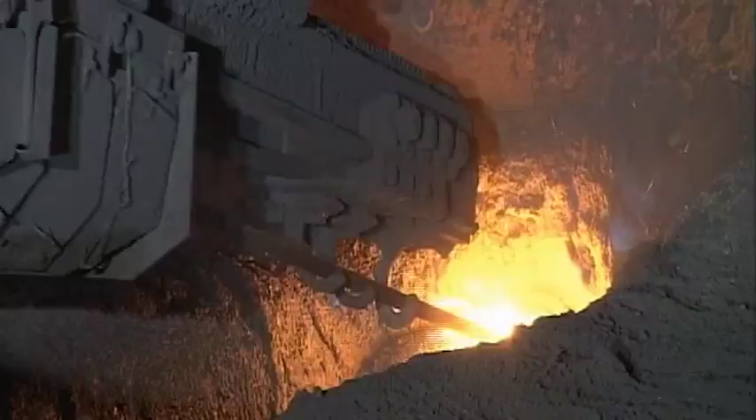JFE Group is one of the leading business groups in Japan, whose activities range from steel manufacturing to shipbuilding and to engineering and construction of industrial plants. JFE Group has 54,000 employees and 230 group companies. Its annual sales volume amounts to 32 billion euros.

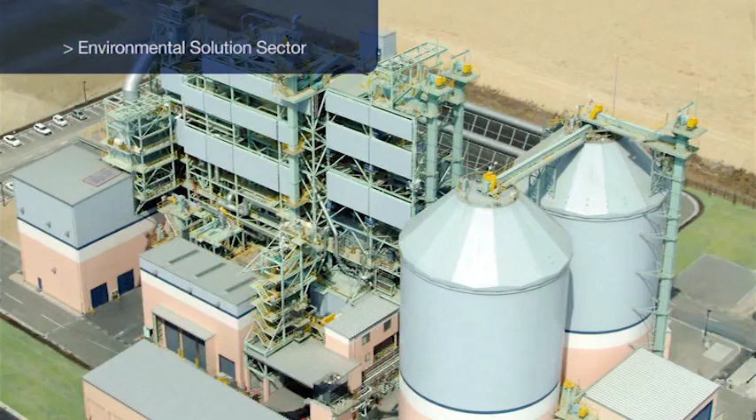JFE Engineering, with its 7,300 employees and its sales of over 2.7 billion euros, is one of the main activities of the JFE Group. It operates through specific divisions in these fields: environmental solution, recycling, energy industries, steel structures, industrial machinery, and research.

Its engineering capability, extensive operational experiences, and a clear recognition of the changes in our society give the company a foresighted vision of the future. JFE Engineering gives priority to combining its corporate growth with respect for the environment. Japan, as a densely populated country, has had to focus on environmental protection, which includes resolving the waste disposal problems. Within this framework, JFE Engineering has been working for over 40 years to change waste into resource.

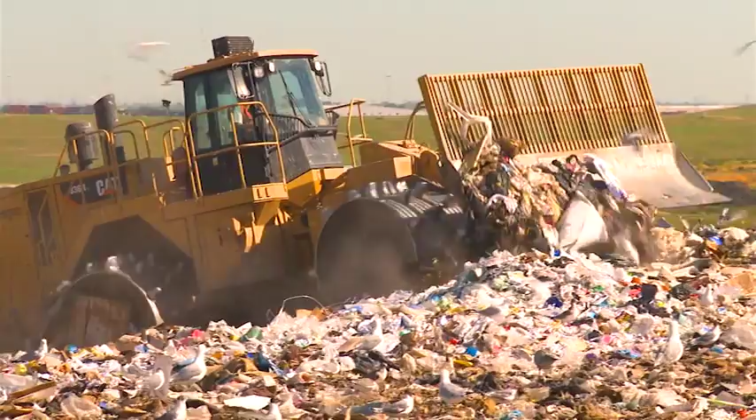From 1968 to the present day, JFE Engineering has designed and built over 150 thermal treatment plants, thus becoming one of the leading companies in the industry and contributing to Japan's success in its modern management strategy. Applying the technology, Japan has succeeded in drastic reduction in landfills, where now only 2% of the total waste is being directly landfilled. The growing awareness of environmental protection leads to the suppression of landfills and of the problems related to this kind of waste treatment.

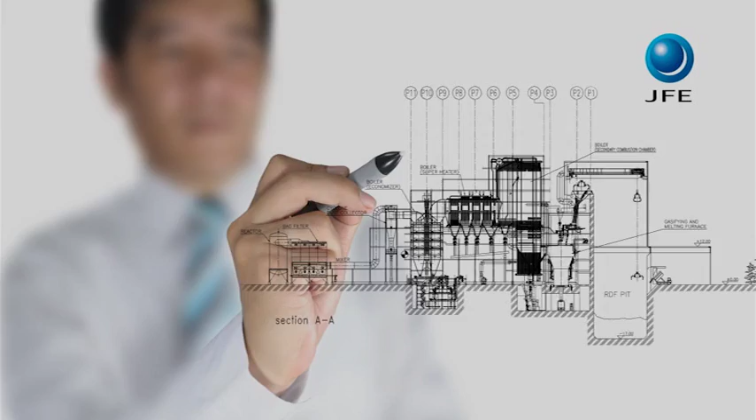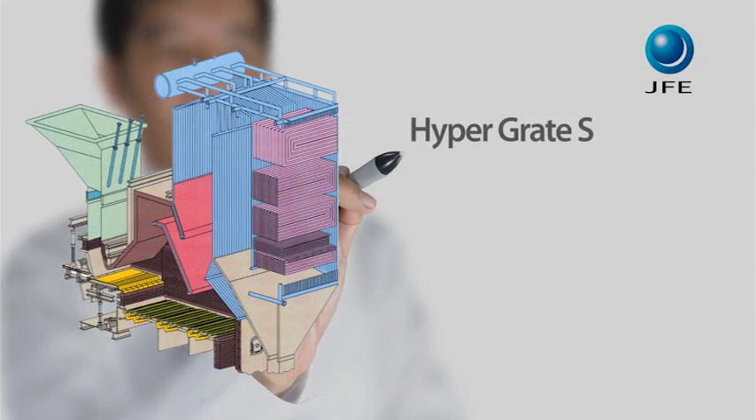In order to put an end to the era of landfills, the European Union has adopted a waste management strategy based on recycling and recovery. Nowadays in the European Union, about 40% of the municipal waste is being landfilled after treatment. The waste that cannot be recycled should be changed to energy or other valuable products through dependable thermal treatment technologies. This is the reason why for over 40 years, JFE Engineering has developed a variety of plant solutions for waste thermal treatment. It is now able to provide all the conventional technologies in their most advanced versions. For example, the Hyper Grate S system, a cutting-edge development of the grate system that makes it possible to obtain the best performance ever with this type of process.

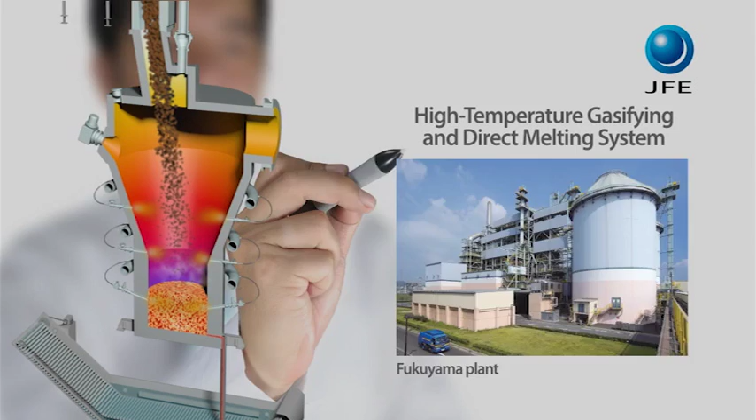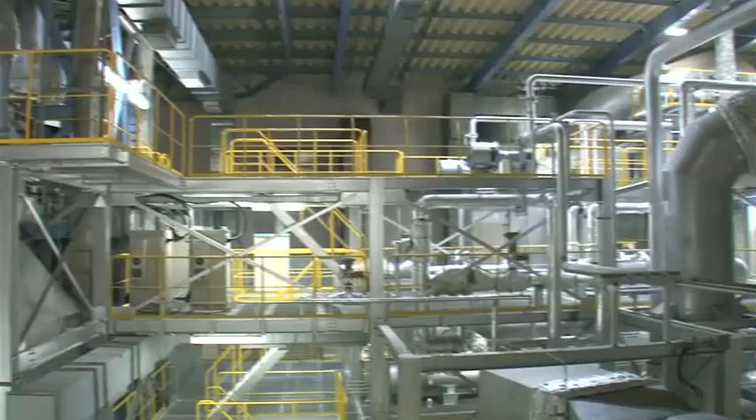The growing demand for environmental sustainability has led and will lead us to adopt increasingly strict regulations and social acceptance criteria. With this in mind, JFE has created its most advanced solution based on the gasifying process, high-temperature gasifying and direct melting system. High-temperature gasifying and direct melting system combines superior environmental protection performance characteristic of the gasifying process with high energy efficiency and top-level reliability.

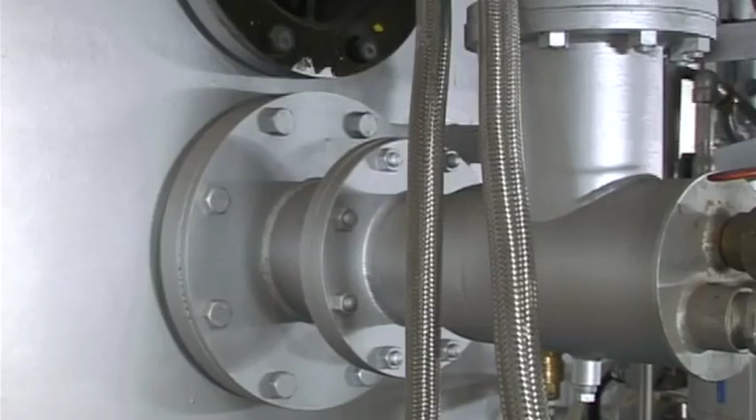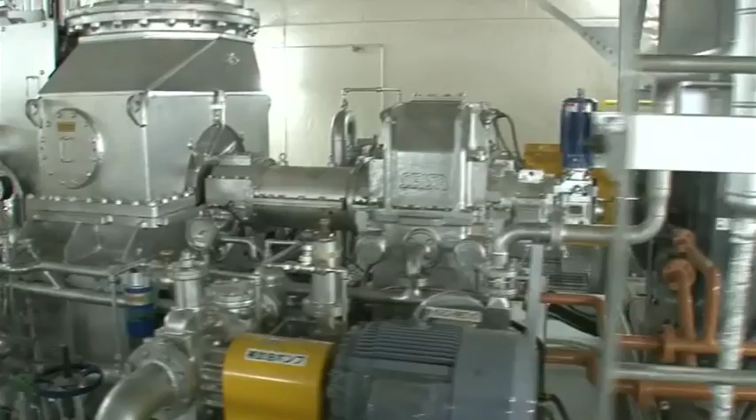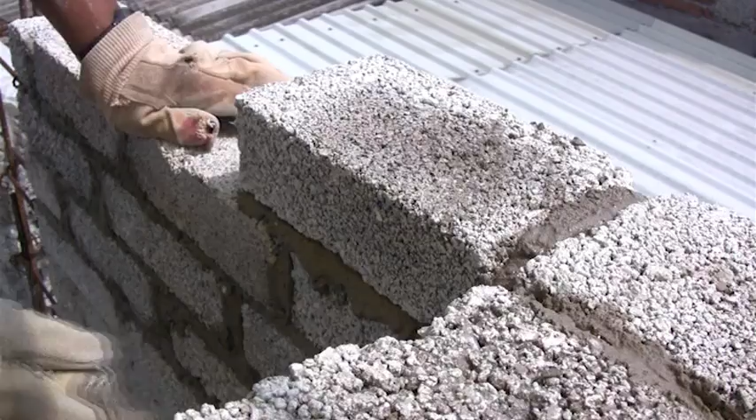The main feature of the process is indirect combustion through gasification of waste. Waste is no longer directly burnt, as is the case for conventional plants, but it is converted into gas. The gas generated is used to produce electrical and thermal energy through an efficient and controlled gas combustion process. By using this technology, it is also possible to recover incombustibles of waste as inert slag and metal, which are recycled in Japan for civil works and industrial purposes. In this way, bottom ash is no longer produced.

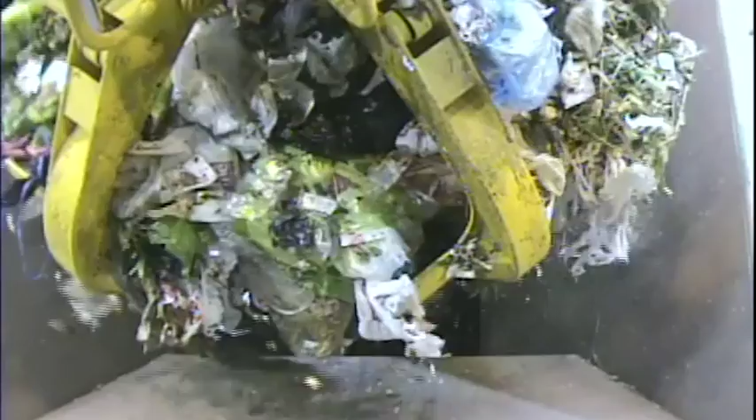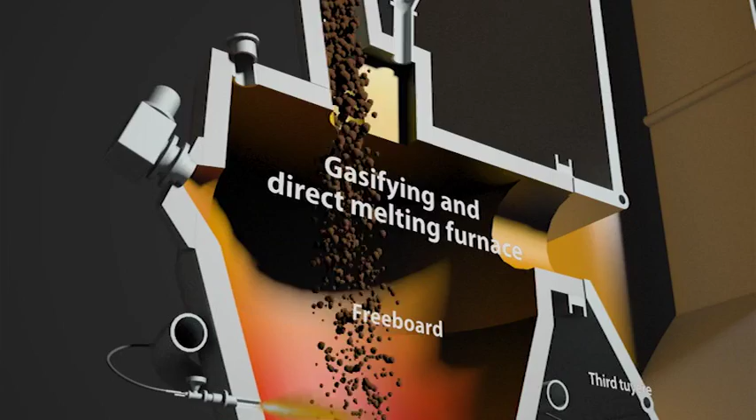The furnace is one of the key components of the system. Waste coming from the storage pit is fed into the furnace. In the gasifying layer inside the furnace, the waste that is placed into the furnace is converted to gas. This happens at 550 to 650 degrees Celsius by means of a controlled air supply through a secondary tuyere.

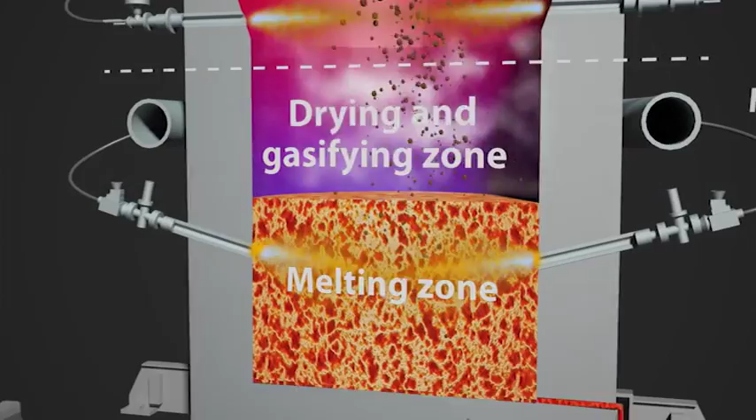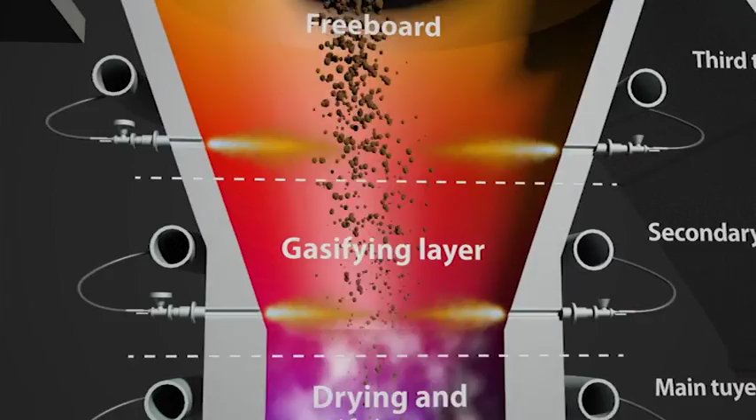Incombustible fraction of waste goes down to the melting layer, where a temperature around 1600 degrees Celsius makes melting possible. This high temperature is achieved with the combustion of carbon having the same function as in a blast furnace for steel making and the controlled injection of oxygen-enriched air through the main tuyere. The melted incombustibles are extracted continuously and brought back to its solid state in a granular form, thus making it possible to separate metal from slag.

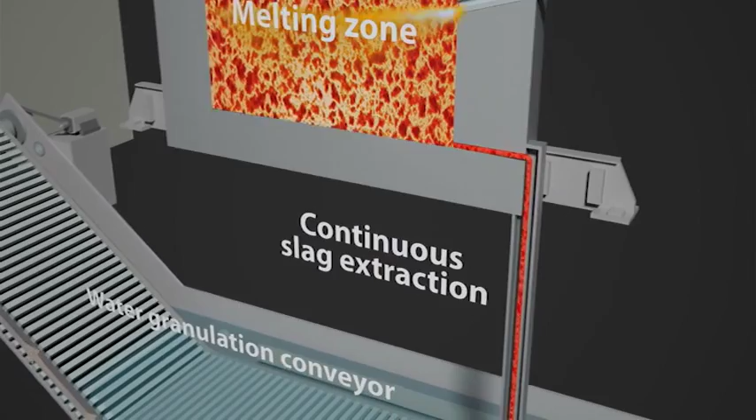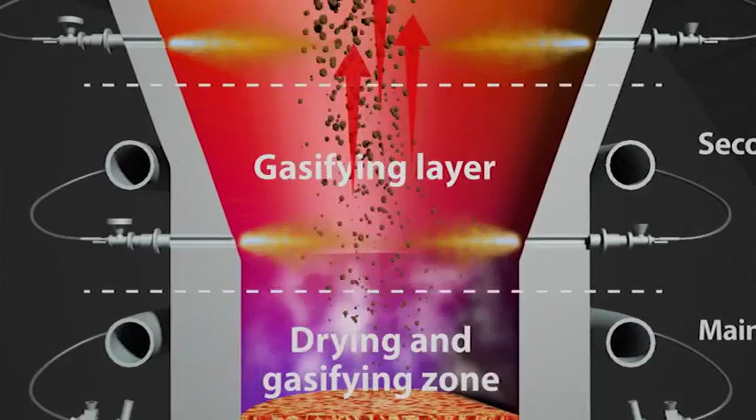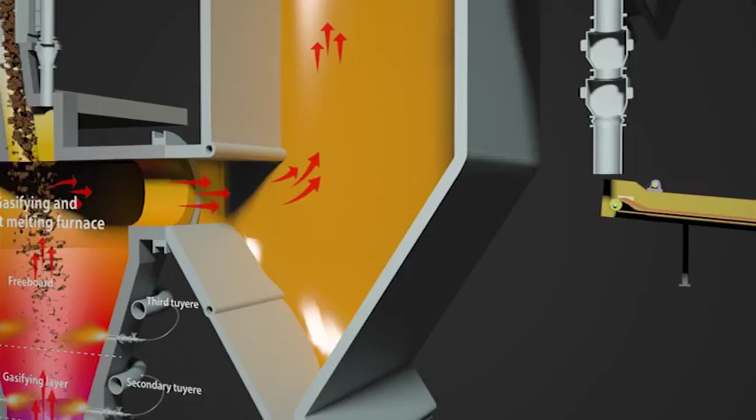The gas generated from waste goes up to the freeboard where it completes its conversion process. The generation of hazardous substances is prevented by the reducing atmosphere at a temperature of 850 to 950 degrees Celsius. The gas obtained from waste is combusted in the secondary combustion chamber. The heat produces high pressure and high temperature steam in a boiler. The steam generates electric power through a high efficiency steam cycle or can be used for district heating or other industrial applications.

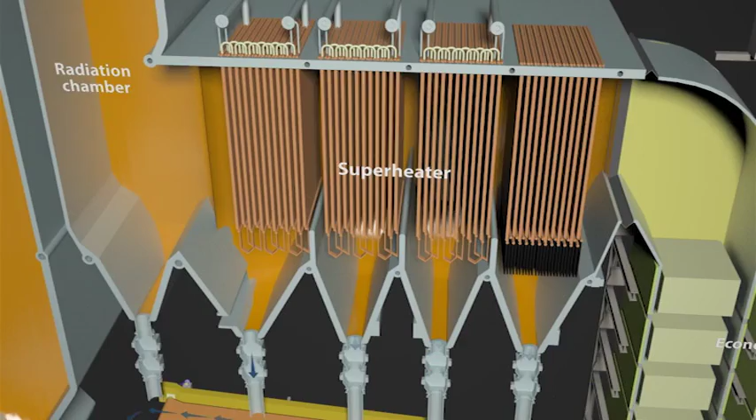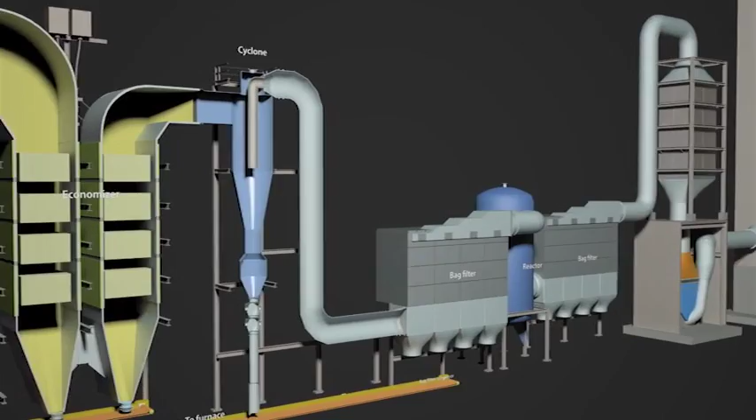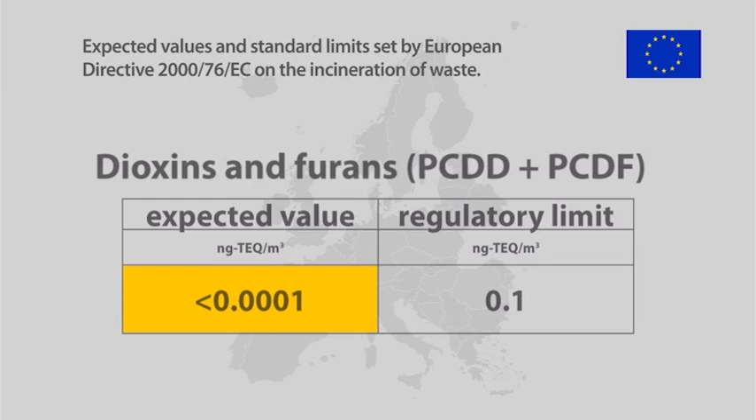To further increase the environmental performance of the plant, the residual ashes can be collected and returned to the furnace where they can be thermally treated. After passing through a conventional flue gas treatment system, the flue gas is constantly monitored and sampled for a close verification and to record its composition. Finally, the gas is released into the atmosphere. The officially certified record in Japan shows an emission level quite lower than the regulations. Especially, the concentration of dioxins is 1,000 times lower than the regulations in Europe.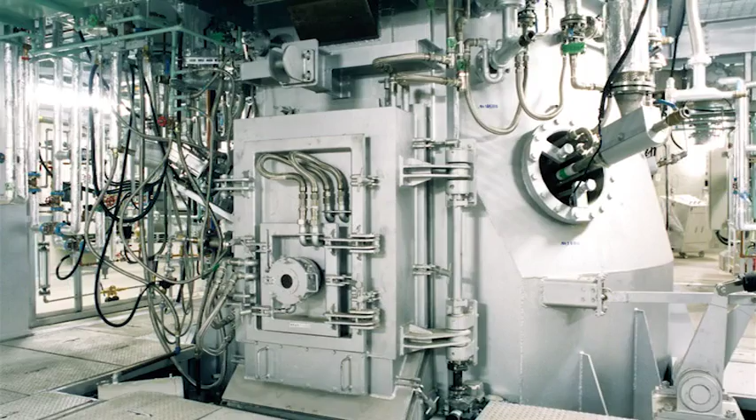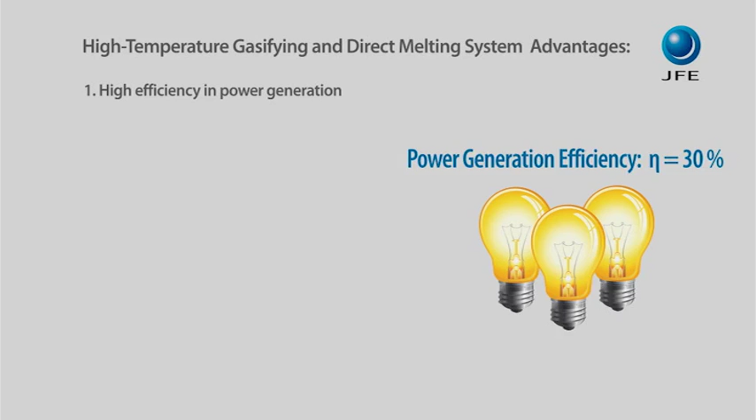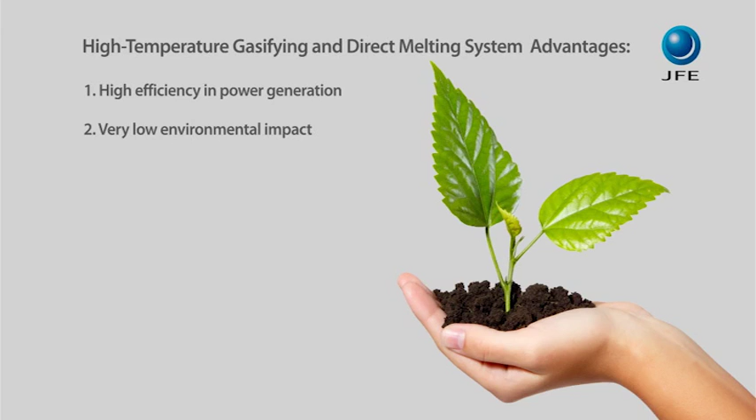The gasifying and direct melting system is the solution for solving problems associated with waste treatment in our modern society. High efficiency in power generation. An efficiency of 30% was realised in Japan. Very low environmental impact. The system prevents formation of dioxins with high temperature freeboard under the reduction atmosphere. All the plants built by JFE have been achieving much lower dioxin emission levels than the regulations. Reliability and safety. Plant reliability and safety are proven through the track records of more than 10 plants since 2003.

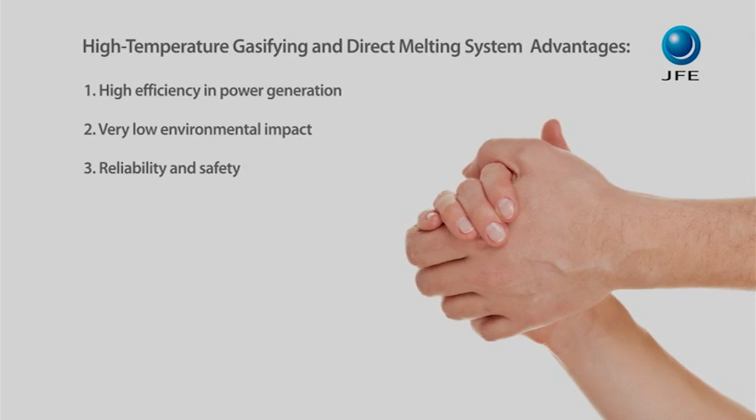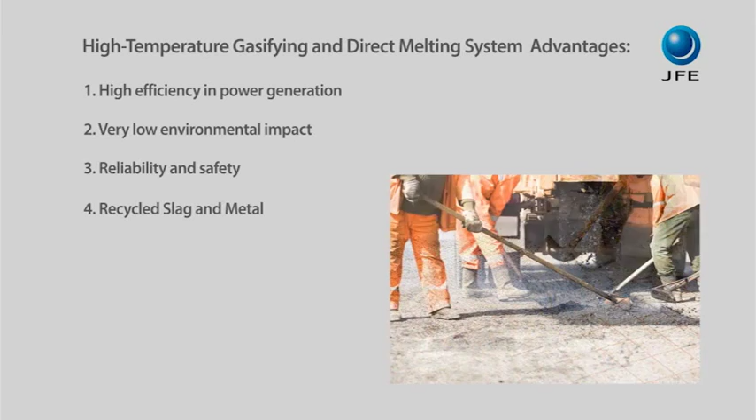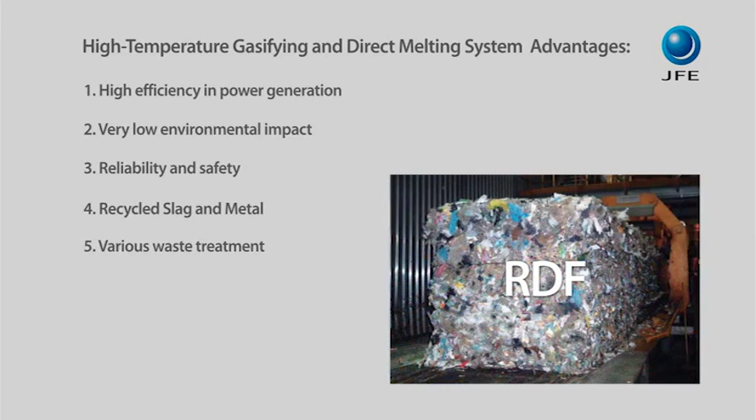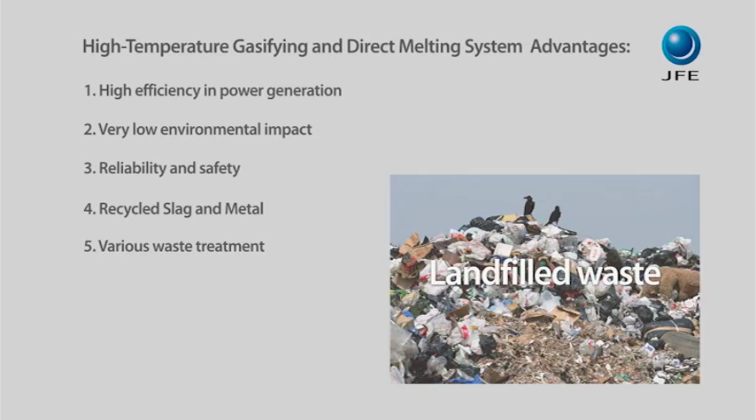Recycled slag and metal. Slag and metals are being used in Japan for civil works and industrial purposes, such as backfilling, road materials, paving blocks, etc. Various waste treatment. A large variety of wastes can be treated, either pre-treated or not, including sewage sludge, automobile shredder residue, hazardous waste, and even landfill waste. Variety of plant capacity. Plant capacities from 1 to 13 tonnes per hour are available.

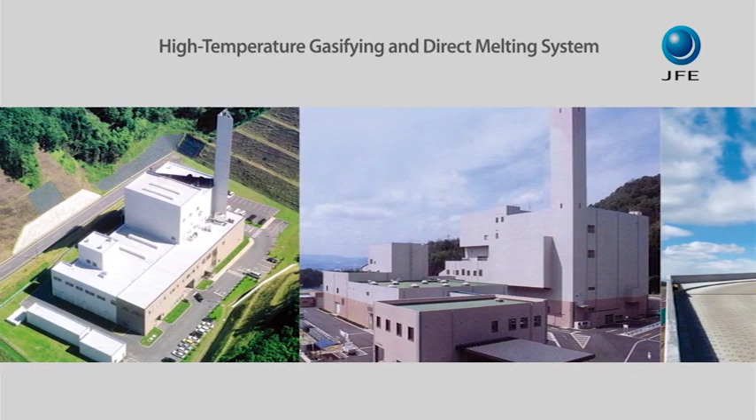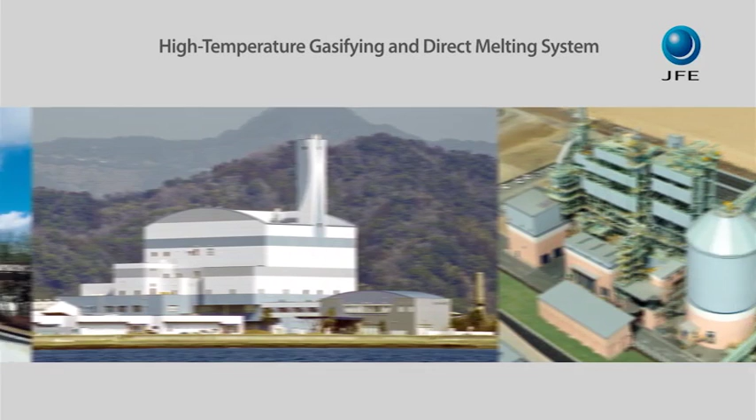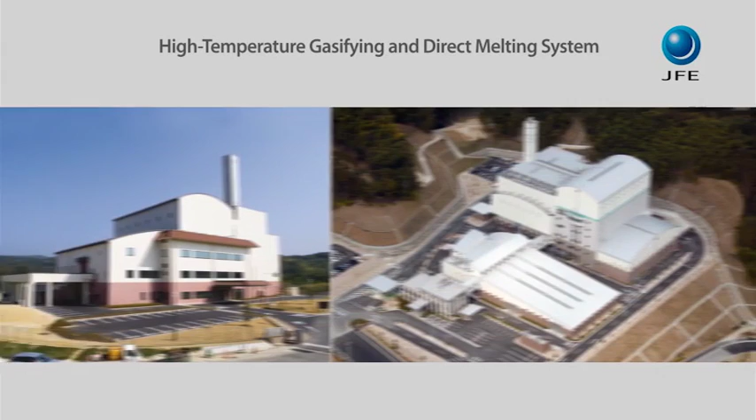JFE's gasifying and direct melting system is a proven gasification technology that is highly appreciated by clients because of the smooth and efficient operation of the plants that have been working for many years. JFE Engineering uses sophisticated engineering combined with a vast experience to design and construct environmentally friendly plants for the future.